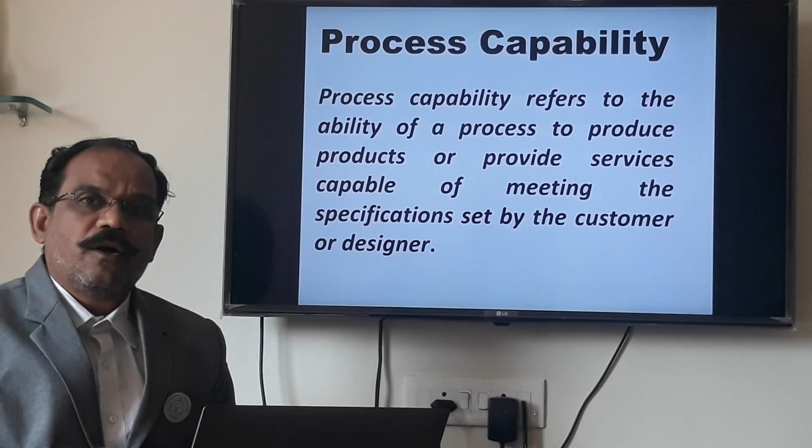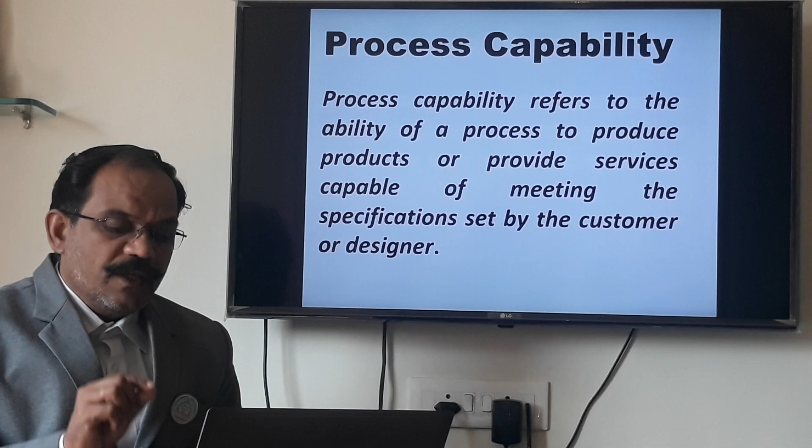Because the customer or designer will give you a specification, that specification must be met by my processes. So that term is called process capability: whether my process is capable of producing such products or not. That is called process capability.

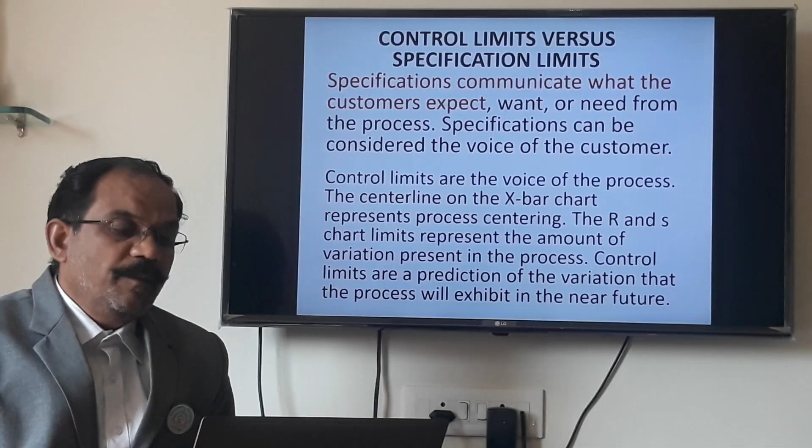Now, earlier also we have discussed the control limits. Now, what is the difference between control limits and specification limits? Because specification is given by the designer. Now, what are control limits? Control limits are also the limits where the product should fall.

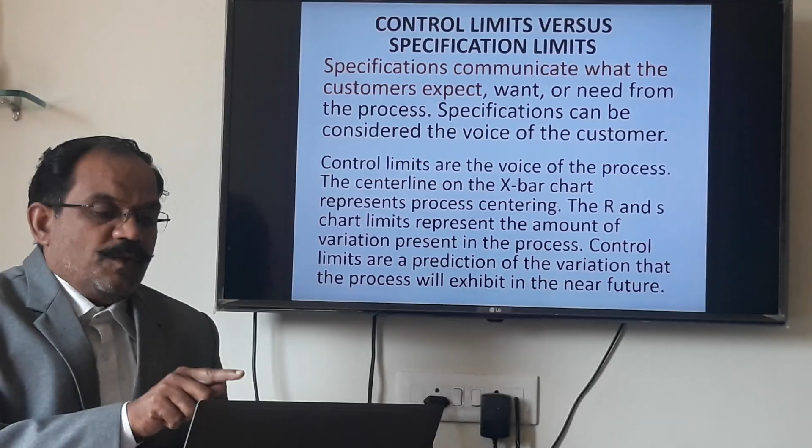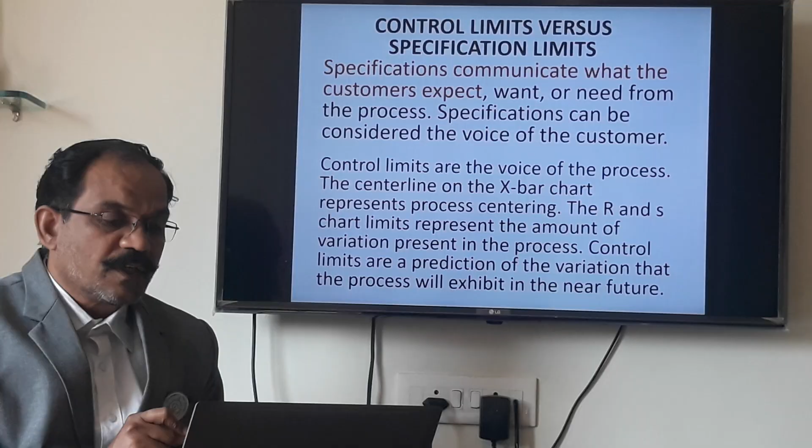So, specifications communicate what the customers expect, want or need from the process, because these are related with the process. A designer should also know from what process we are going to manufacture our product. So specifications can be considered the voice of the customer, because after all the product is going to be sold in the market. So specifications are the needs of the customer.

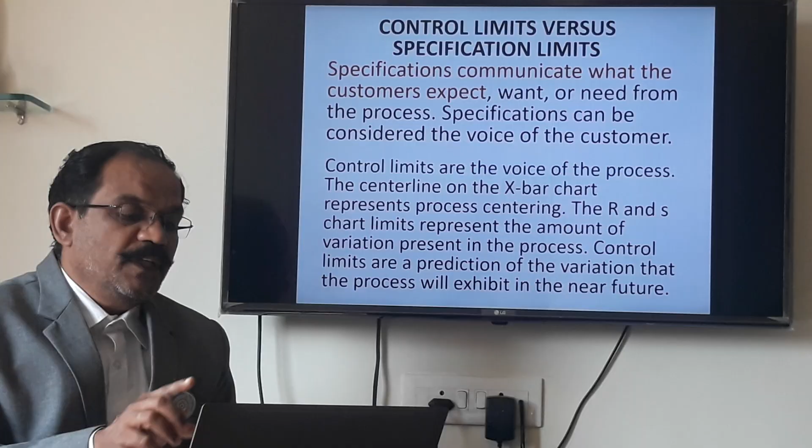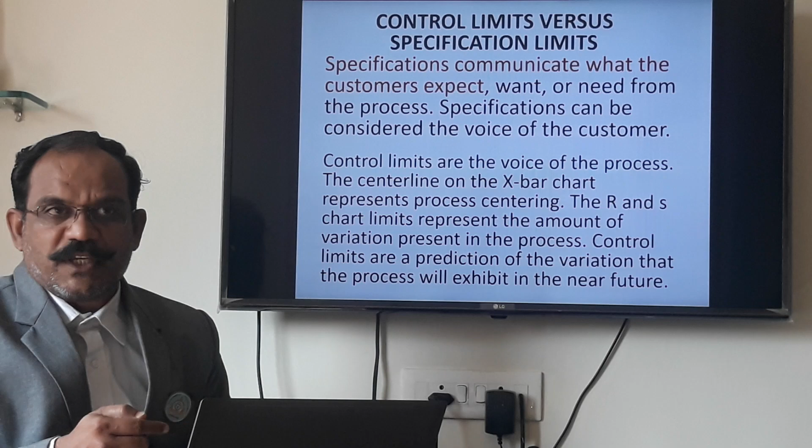Now, what are control limits? What we have discussed earlier: control limits are the voice of the process. These are the voice of the process. There is a difference between specifications and the control limits.

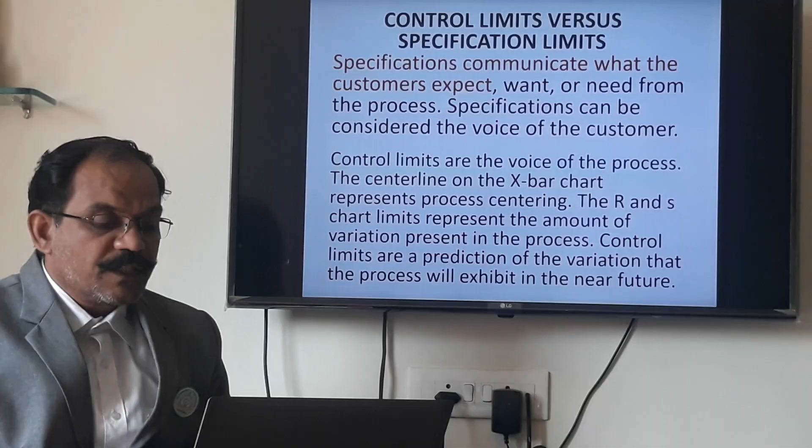The center line on the X bar chart represents process centering. The center line on any chart represents the centering of the process. The R and S chart limits represent the amount of variation present in the process, whereas control limits are predictions of the variation that the process will exhibit in the near future. Control limits will display the variation in the near future.

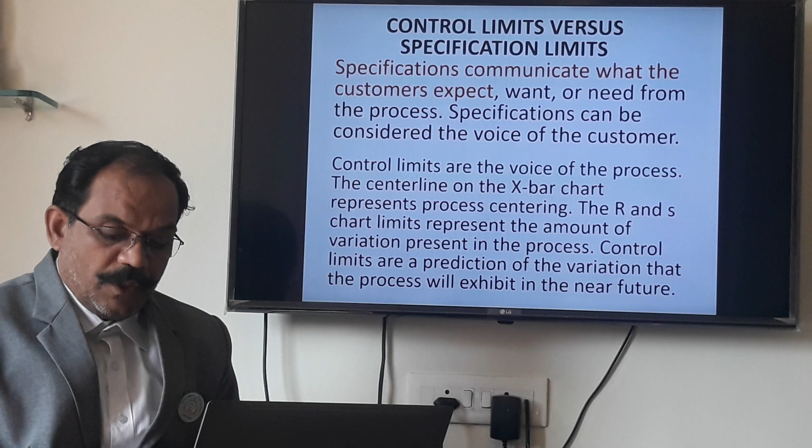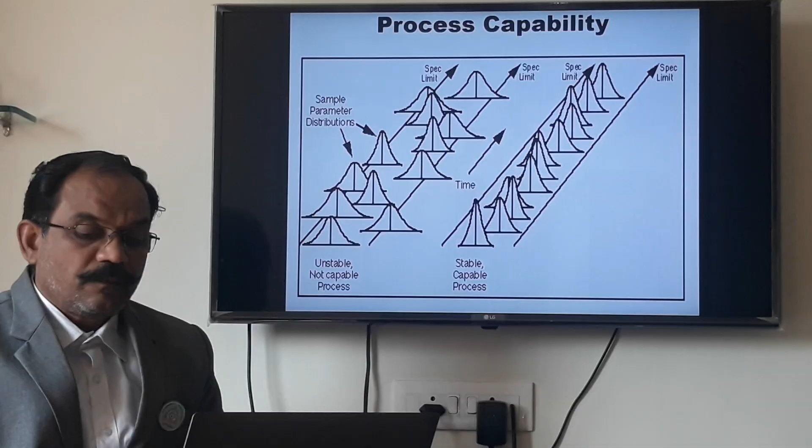It is unstable and not capable. The first figure shows the unstable and not capable process. So this is the capable process, because all the processes, all the indicators, are falling within the line.